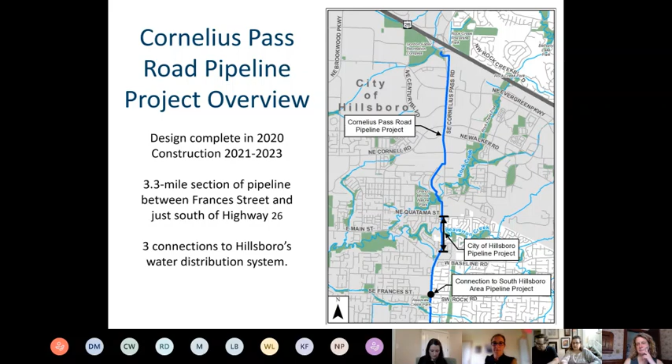The section we're going to talk about specifically today, we're calling the Old Rail Corridor. As many of you know, it was an ODOT rail right-of-way, and the program purchased the property a couple years ago for the intent of putting in this pipeline. So we're calling it the Old Rail Corridor section—it's a bit wordy, but we think it tells the story.

You can see it's one of the few areas that deviates from the Cornelius Pass Road right-of-way. The main reason is that it's not constructible within the right-of-way through this area because of Rock Creek and the TriMet tracks that cross over the road. It's impossible to get the equipment and pipes we need within that part of the road. Years ago, even before I was on the program, there was foresight that acquiring this property would be the best option for the alignment.

So you can see it goes through Orenco Woods Nature Park, where it has to cross the TriMet tracks. We will be doing a trenchless crossing, boring underneath the tracks. From there, we will be doing open trench excavation all through the Old Rail Corridor and across Cherry Drive until we tie back into the Cornelius Pass Road right-of-way at the north end. I think that's it for this slide.

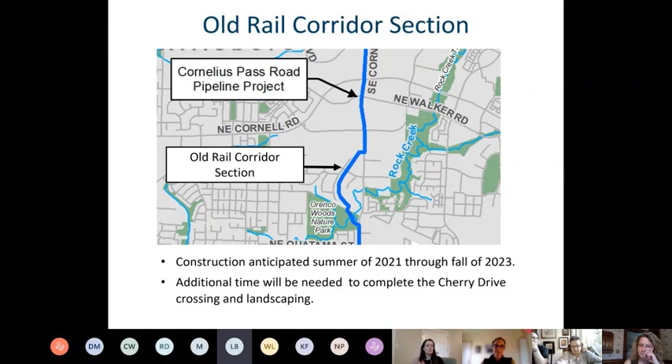There was a question about whether any trees are already designated to be cut down on the west side, since some trees are tagged there. All of the trees have been tagged as part of a tree survey we do, which is a city requirement and also our own due diligence. Every tree over 8 inches diameter at breast height is surveyed. So if you see a pin and a number on a tree, that does not mean it's marked for removal or marked to be saved, it's merely a marking as part of the survey of every tree on this property. The numbers relate to species and size, and we'll also have an arborist on site to determine if any trees need to come out for safety or health purposes.

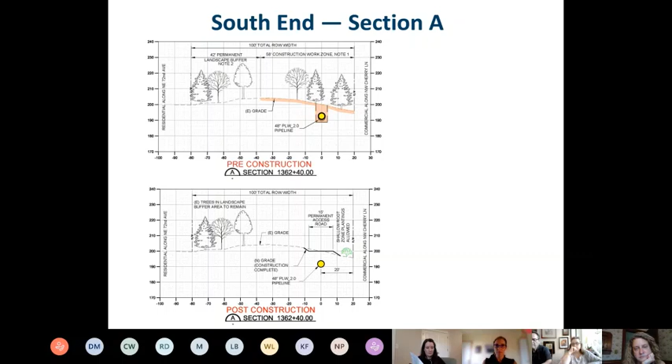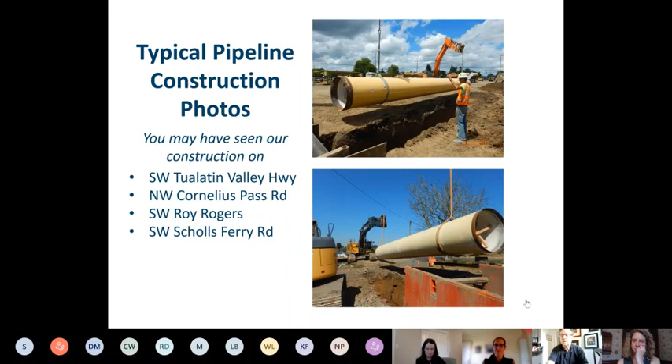As I mentioned, we are currently at 60% design. So at this point, we've just focused really on the engineering of where the pipe can go, how deep it needs to be, and where it needs to be horizontally within the alignment. We are progressing right now to get to 90% design. That is planned for close to the end of 2020. At that point, we'll have more details figured out, like exactly what the site will look like once construction is complete, what kind of landscaping, fencing, security gates, and other things we're going to install. We will work those out in the next 6 months or so as we finish up the design.

Marlys, do you want to talk about any more opportunities to get feedback from the neighbors? Yeah, so I've been in touch with a lot of you for 5 years and have a pretty good understanding of what the concerns are. But when we have more detail around the landscape plan and, like Erica mentioned, any kind of security features, we'll be back with the neighbors to show them and see if there are opportunities for people to weigh in on that. Obviously the aesthetic, the security, and the landscaping are all really big items of concern for the neighbors, so we're well aware of that.

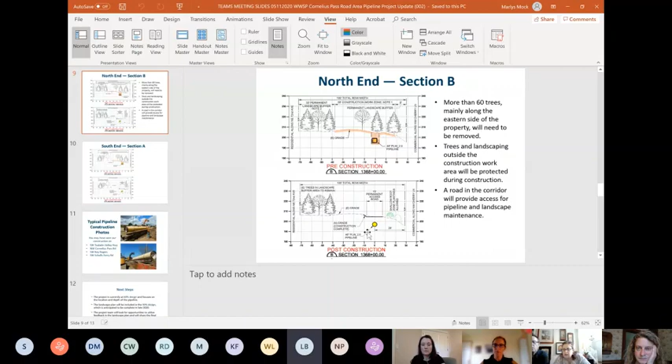Okay, yeah, so I think Scott may have joined a little late. We have shown the preferred alignment for the pipe is along the eastern edge of the property, and because of that, most of the trees along the eastern edge of the property will be removed for construction.

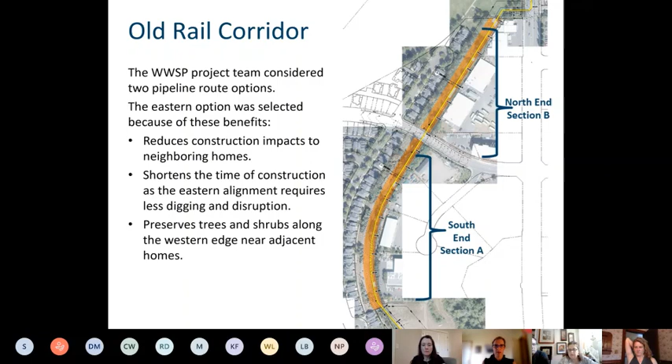Actually, the next slide, Marlys, if you want to scroll down one. So you can see here there's a 100-foot right-of-way for the property, and we need about 50 feet to perform the construction. The pipe is about 20 feet from the eastern property line, which is preferred to minimize construction impacts to the residents and homeowners on the western edge, as well as being better engineering practice since the pipe is shallower there. But that does mean removing the majority of the trees along the eastern edge of the property.

And what are the normal working hours for the construction crews?

Marlys, did you want to cover this? I know you'd been working on it. We plan to follow the city of Hillsboro's noise ordinances. I don't remember off the top of my head the exact hours, and I don't want to say it wrong, but the city of Hillsboro has allowed construction hours, so we would fall within those construction hours for the most part.

I don't know if there's really any more to say about that. I can get those numbers and send them out to the group too.

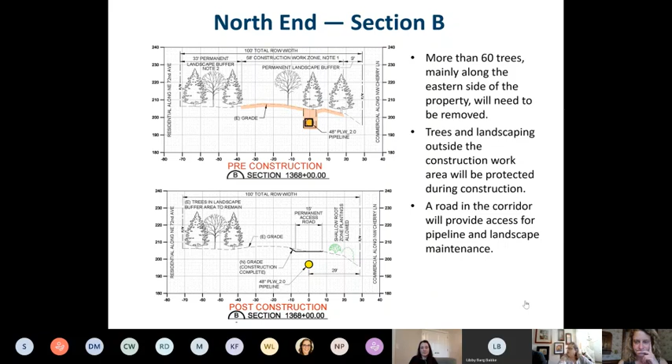Okay, so I think what we're going to do is I'll go to the final slide here, and we can hang out for a few minutes if people want to ask some more questions, or if people want to unmute and ask some questions. Or we can just be done and you all know how to reach me and we can have more conversations. So it kind of depends on interest and if anyone chimes up.

You have a thank you from somebody. Oh, thanks, great, very helpful.